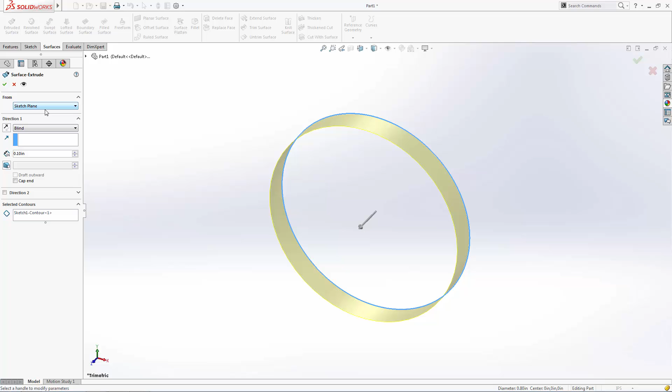Previously on A Tribute to Uncle Ben: we began our series by laying out the basic shape of Spidey's ring using the extruded surface, swept surface, and filled surface tools. Stay tuned for part 2, where we'll lay out the surfaces for our power and infinity symbols using some unique sketch tools. Be prepared to increase your sketching powers in this part of our 4-part surfacing series.

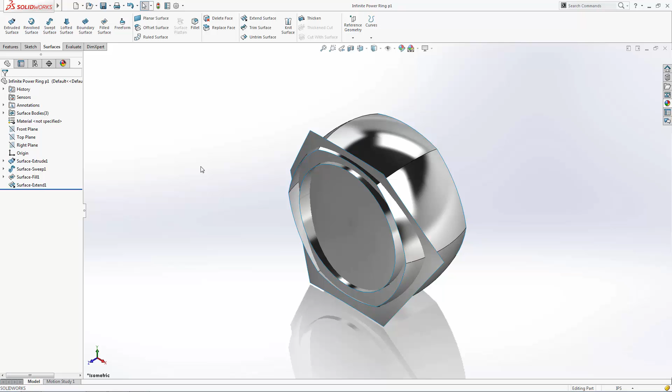Let's start with the power symbol. We need to be able to extrude this sketch from this top face only. So first I'm going to use the offset surface tool to create a surface 0.02 inches below the outer surface of the ring. In other words, our power symbol will be recessed into the ring 0.02 inches.

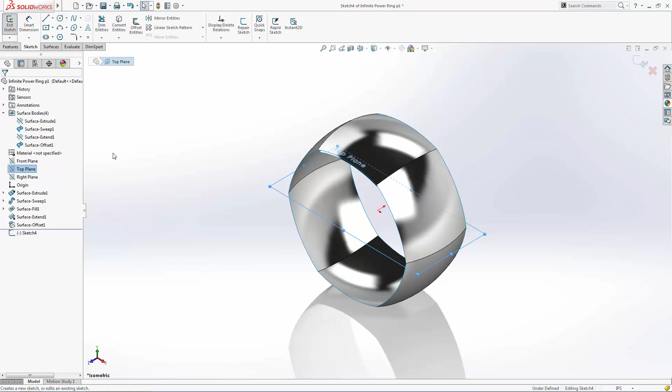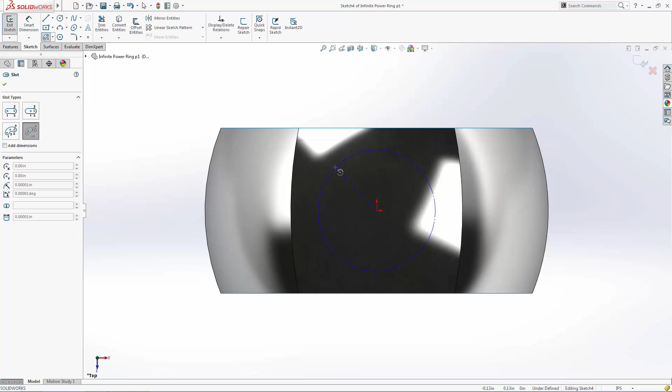Let's draw the power symbol using a few of the slot sketch tools. We'll start with the little known arc slot sketch tool to create a circular slot shape. We'll use the center point arc tool, first clicking on the origin to set the center of the circle, then clicking where we want the top left portion of our slot to be, and moving counterclockwise, clicking where we'd like the top right portion of the slot to terminate.

We'll use a simple straight slot to complete the symbol, and I'll add in some dimensions and relations to constrain the sketch to the size we want it.

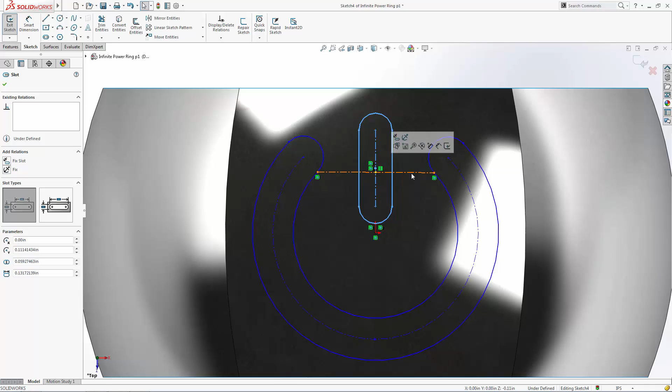Let's ensure the endpoints of our circular slot are horizontal to each other, and I want the end of my straight slot to be coincident with the origin.

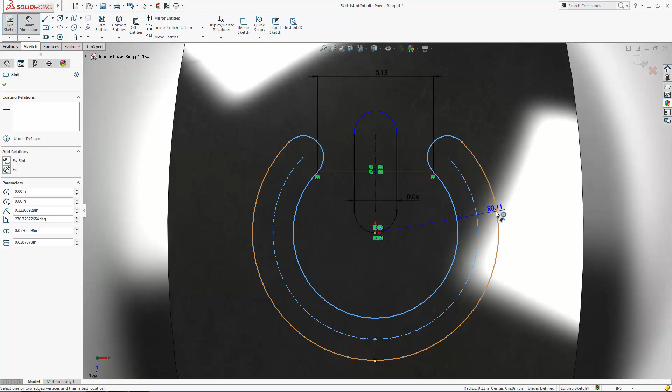Let's just set a few dimensions here to get the size right, and we'll dimension the line weight of both the straight slot and our circular slot to make sure they're even. Finally, to fully lock this sketch down, we'll set the radius of our outer circle. Notice time and time again, with every single one of my sketches, I'm making sure that they're fully constrained.

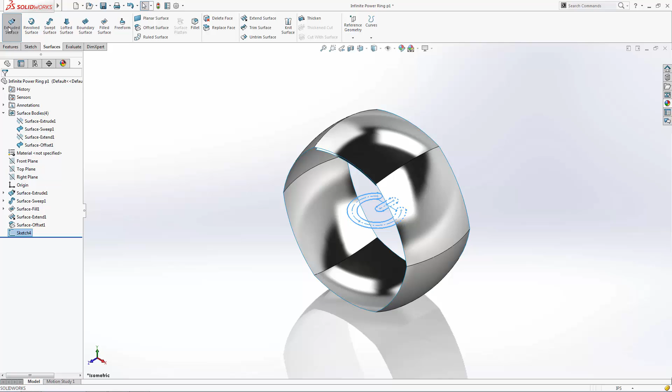Now let's extrude this surface, but instead of extruding from the sketch plane, we're going to extrude from the offset surface we created. Let's extrude at 0.04 inches to ensure the surfaces extend past the outer surface of the ring for trimming later. You'll notice when extruding from a uniquely shaped surface, the ends of the extrusion take on the shape of the reference surface.

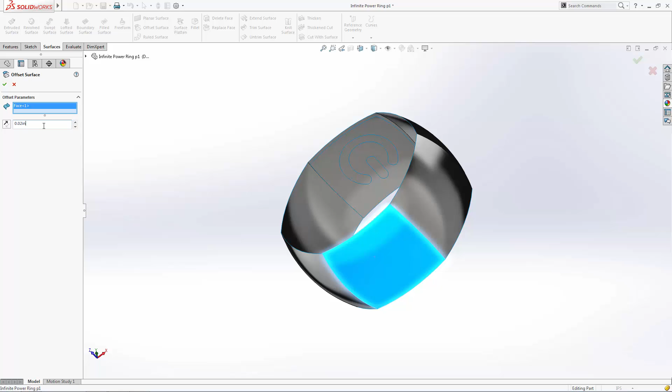Now let's begin laying out our infinity symbol. We're going to extrude this from the face opposite where the power symbol lies, so again we need to create an offset surface. However, this time we're going to extrude a positive out from the surface of the ring, so we'll set the offset to 0.02 inches.

Now let's sketch on the top plane again. We'll begin laying out this infinity shape by sketching its negative space first.

Here's a quick shortcut for creating arcs tangent to a straight line. When using the line tool, simply back up to hover over the previously set point until you see the small yellow box around the point. Then continue on to set your tangent arc.

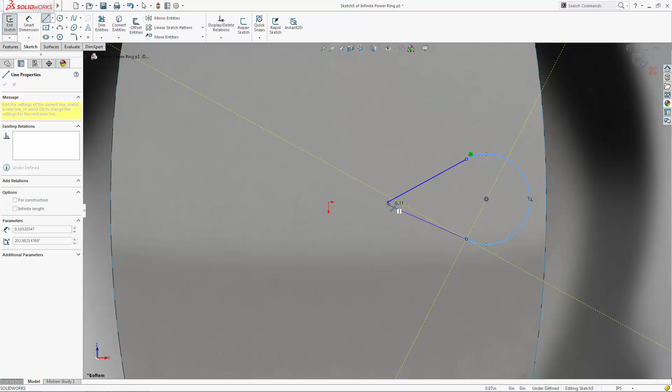Let's set a few relations and dimensions here to help in constraining this sketch. Now let's set the radius of this arc to 0.05 inches. Now to create the line weight of this symbol, I'm going to use the Offset Entities tool, set at 0.05 inches.

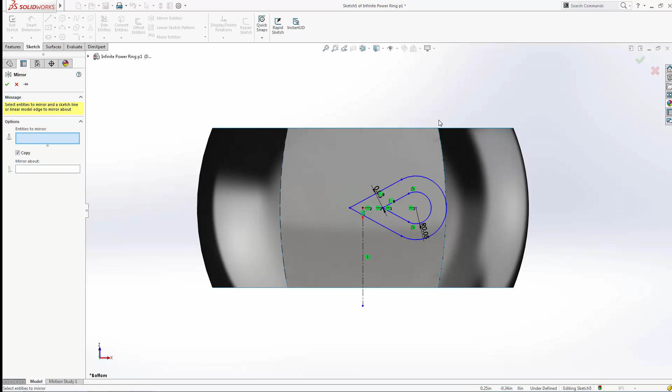And now we can simply mirror this sketch to create the other half of the symbol. First, you must have a center line sketch to mirror about. Then we'll use the Mirror Entities tool to mirror our sketch across that center line.

We have a few unneeded lines here that we want to trim away, and the trim tool itself has several options to choose from. Just to name a few, we can use the Trim to Closest option, where you select each line individually to trim them to their nearest intersection points. Or there's the Power Trim option, which allows you to hold down your left mouse button and essentially sketch through the lines you want to trim away in one motion.

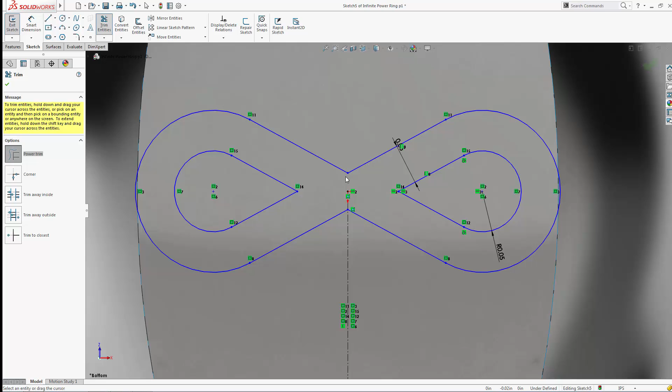Again, let's just set a few relations and dimensions here to make sure our sketch is fully constrained. The biggest thing I want to make sure is my angled lines are collinear with each other.

Now that we're happy with our infinity shape, we need to split the sketch in order to create an S shape to act as a reference surface. We'll explain why we're doing this in part 3 of this series.

But for now, let's split this sketch up while at the same time avoiding the loss of the constraints on the sketch. We'll first draw the horizontal lines where we want the S shape to terminate, and we want to split the sketch arcs in half in order to create the shape we're after.

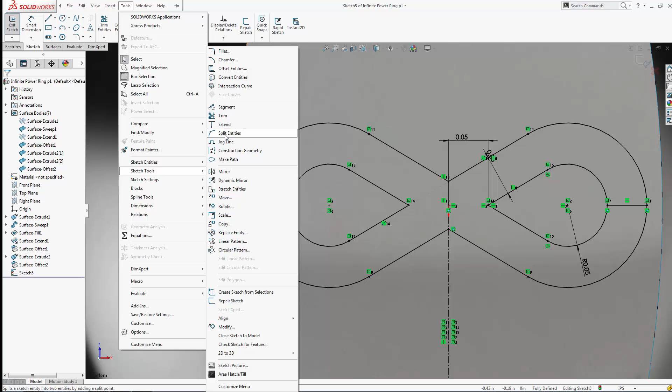So we're going to use the Split Entities tool to split these arcs in half. We will get a warning that the midpoint or equidistant relation that was automatically set on the arc segments is going to be deleted. Don't worry about this for now, as we'll fully constrain this sketch again in a moment. Let's select anywhere on the 4 arcs to split them.

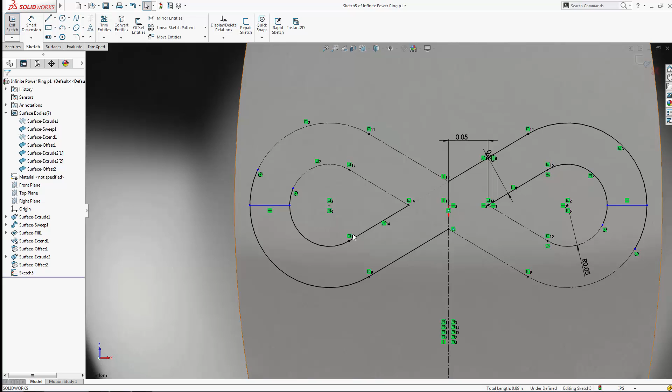We'll select the entities that we'd like to convert to construction geometry, and then reset the split points to be coincident with the horizontal lines that we drew. Let's add in a horizontal relation to lock our horizontal lines back down.

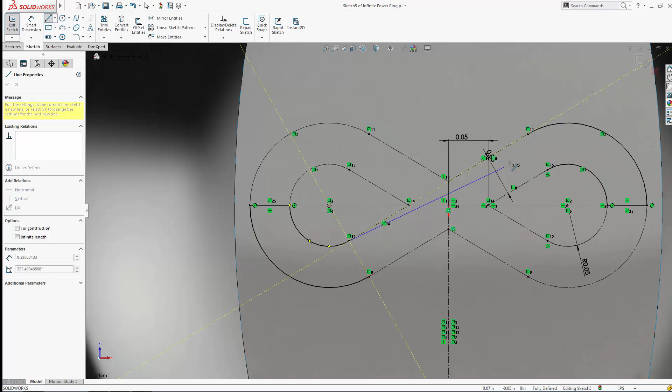And finally, draw in some straight lines to complete our S shape. Now let's exit the sketch and hide our ring's outer surface to reveal the offset surface we created earlier. Similar to how we extruded the power symbol, we're going to extrude this S shape from the offset surface, this time towards the inside of the ring.

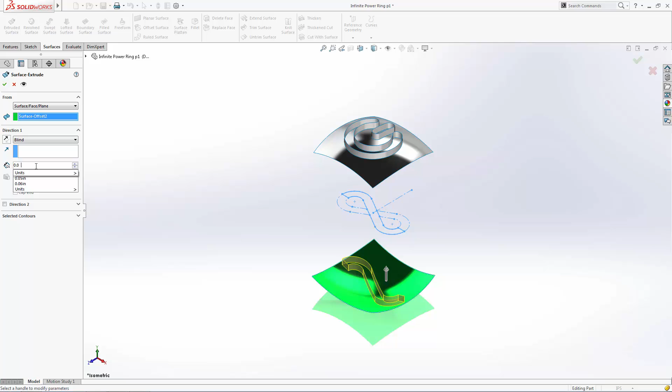Now let's create the other half of this infinity symbol by mirroring this S shape across one of its planar faces. Enter the Mirror tool, select the planar face to mirror about, and in the Bodies to Mirror selection box, select the S-shaped surface body.

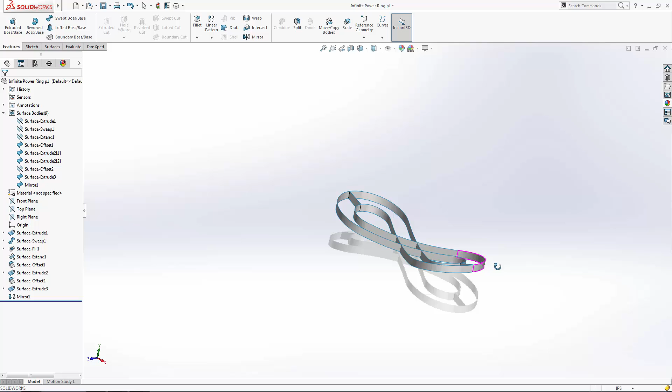Alright, we're well on our way to infinite surfacing power. Stay tuned for part 2 of this series, where we will use these infinity surfaces as references for some more complex surface tools.